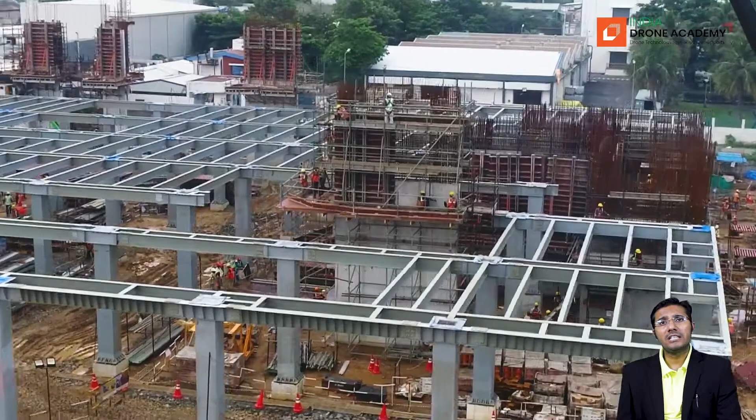BIM is an acronym, stands for Building Information Model. It is a kind of project management technique which allows architects, engineers, contractors, and other construction professionals to plan, design, and construct a structure or a building within one 3D model.

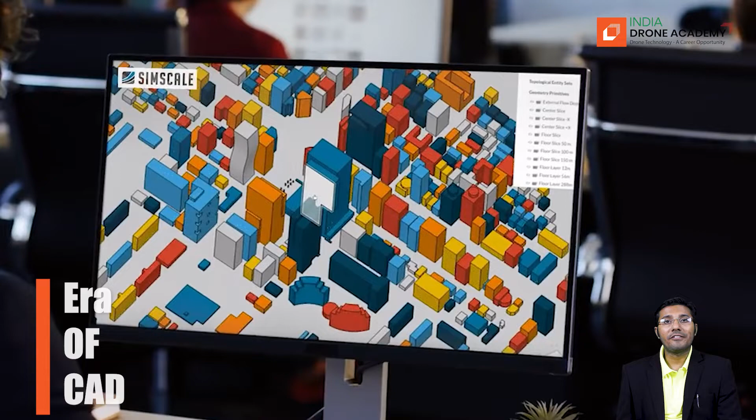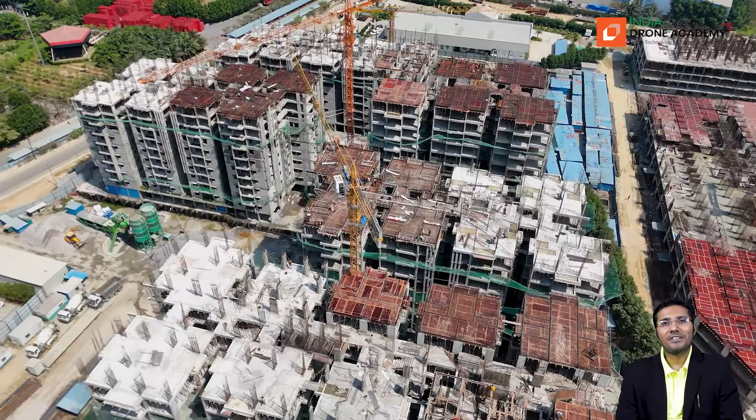Previously, blueprints and drawings used to convey information about building plans. Next came the era of CAD that helped drafters see the design plans in a digital environment. And now BIM is a standard in the construction industry, far more than just a 3D model.

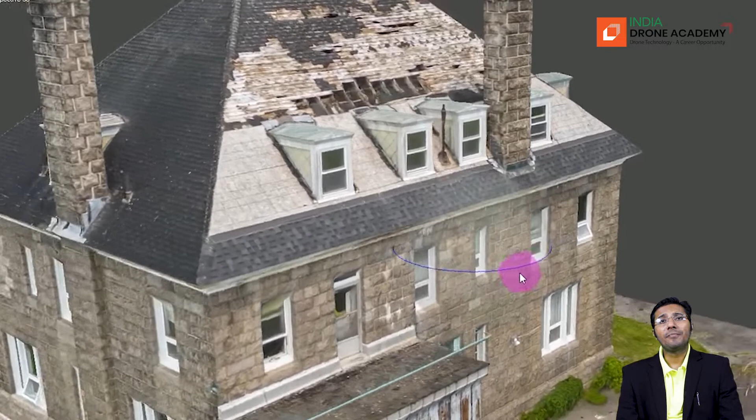Let's talk about the role of drones in the BIM process. Drones nowadays have become an extremely cost-effective method to scan a site or an asset and transform it into a digital 3D model. This 3D model can be easily connected to BIM tools, further allowing construction professionals to use them for their project work.

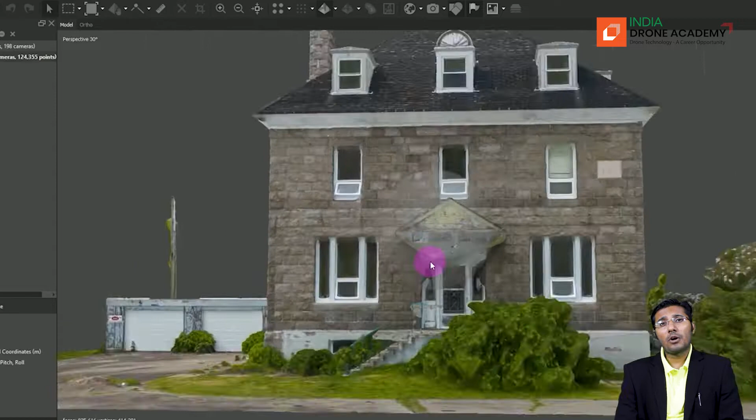There are many benefits of integrating drones with BIM, as it brings accuracy in the project data, allows better visual representation, streamlines communication among project stakeholders, and supplements the 3D model with real-time updates.